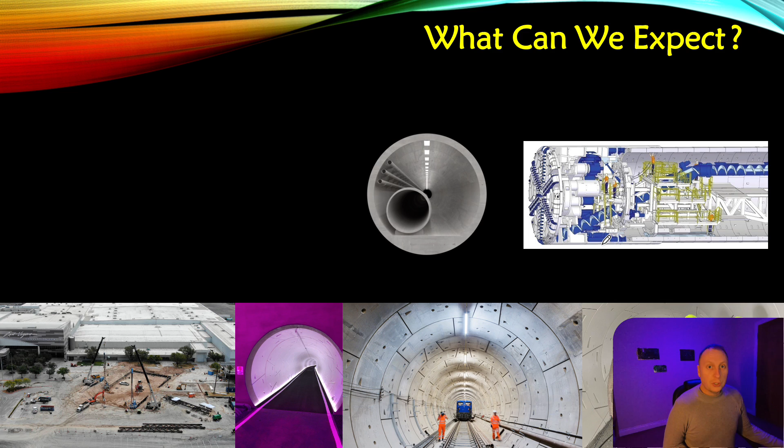So it looks like Prufrock-3 won't be coming this year, but we should, with some luck, see it early to mid next year. What can we expect? Well, Prufrock-3 will be a game changer in terms of performance.

Performance is the key term, because when it comes to mining, it's all about performance, reliability, and obviously the cost per TBM mile, which I often bring up when I'm talking to people who are somewhat hating or doubting the prospects of this particular machine.

Operational efficiency is absolutely key, and that includes everything from the maintenance of the machine to physically how many people it takes to operate that machine, how much it costs to run that machine, the actual processes behind the machine that ensure it has the materials and resources it needs to progress forward in a timely manner, consistently, without delay.

High performance. When I say high performance, I mean that this machine can really cut through the ground without having to stop repeatedly. It's a very key indicator of how much progress the Boring Company have made in regards to high performance.

Because at the moment we have a powerful machine, which is very powerful for its size, but it's not being given the opportunity to really go full out. Hopefully with some other changes, Prufrock-3 will be very high performance, even on its bad days.

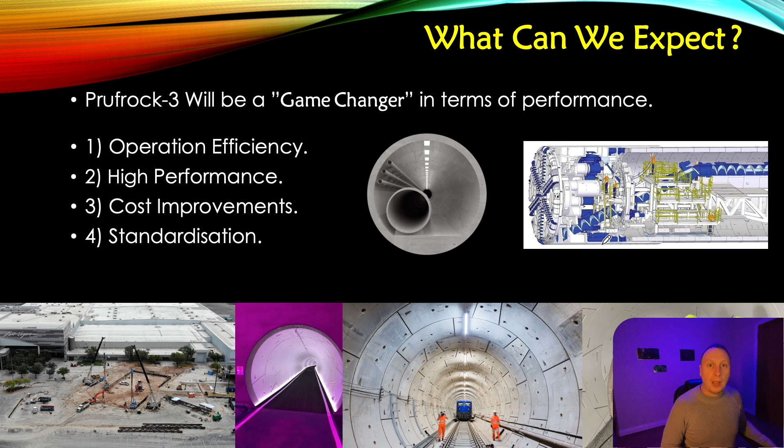The problem we have at the moment with the current tunnelling industry is we have 60, 70, sometimes 80 different standards for all the various sizes and types and processes in the machines, and it's an absolute nightmare. We need to get away from that, and get into the mentality of doing things in a set way.

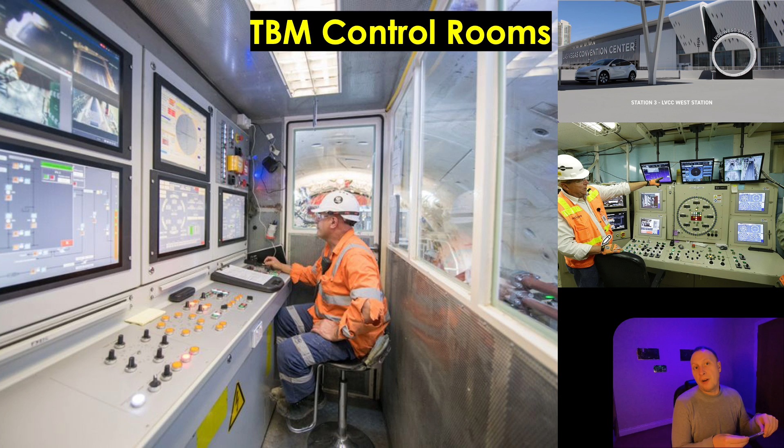Okay, so I have heard from a very good source that there is going to be a major change when it comes to the TBM control room or rooms, because they're going to have multiple TBMs. But that in itself is a little bit of a trick.

Now, the way it typically works in this industry is you have one guy in the TBM close to the excavation chamber, as you can see this gentleman here, and he is watching the various processes. He's there, able to see what's going on and to actually feel the progress of the machine and make an assessment as to what changes need to be made on a minute by minute basis almost. And he's in there basically, him and possibly another colleague, because I'm assuming they work around the clock, 24 hours a day.

However, there is a big opportunity here. You may have one operator, you may not even have an operator, or you may have an operator assisted by AI, and that one operator controls 4, maybe up to 6 machines from one control room, and that control room is not in the TBM itself. Obviously it's wired into the TBM, but it's at the surface, and you've got one guy essentially monitoring, let's say 4 machines. That's a reasonable number, and the actual system monitors the TBMs as well, and is able to analyze and diagnose issues or problems, or to assess what's needed, and it will actually automate various changes rather than him having to do the various tasks.

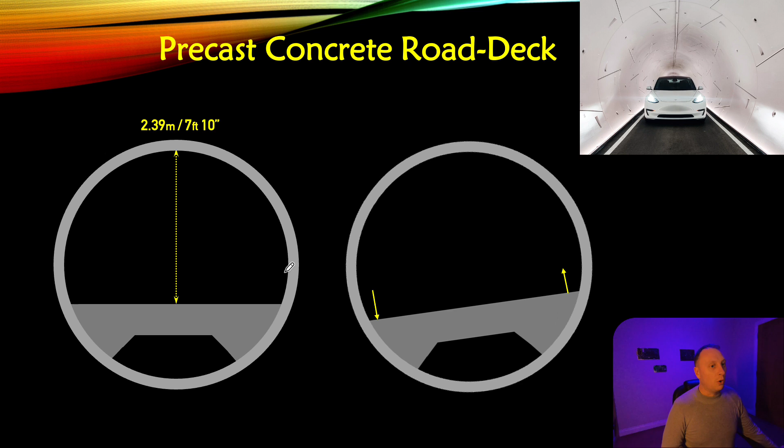Another great thing about this is ultimately these road deck segments are not going to line up quite perfectly. They never will. But what you can do is still end up with a perfectly level surface by introducing a screed on top of that. That screed does not need to be particularly deep - we're talking about 65mm, 60mm, something in that ballpark. When that surface wears down, you can simply grind it off and replace it with another surface, and there's no need to worry about wear and tear on these precast concrete segments.

So this is a massive change that we know is coming. I've heard it's coming, and it will certainly reduce the length of the program and lower the costs of the overall job.

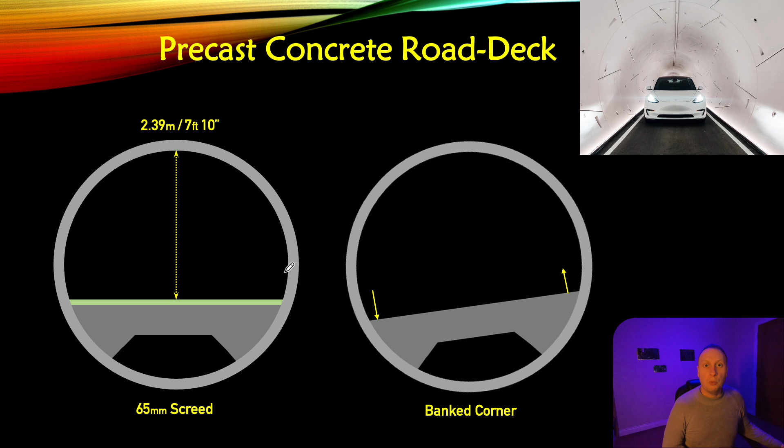Banked corners as well, incredibly important, because you can increase the speed that vehicles go around corners by potentially as much as 30% by using the banked corner. Trains do this - I believe they call it cant, so that one rail is slightly higher than the other, usually around 20, 30, maybe even 40mm higher, and that makes a big difference for trains going around corners. For road vehicles like our Tesla above here, having a banked corner as below would make a massive difference, and you can still ensure passenger comfort as well, so it's not a big deal.

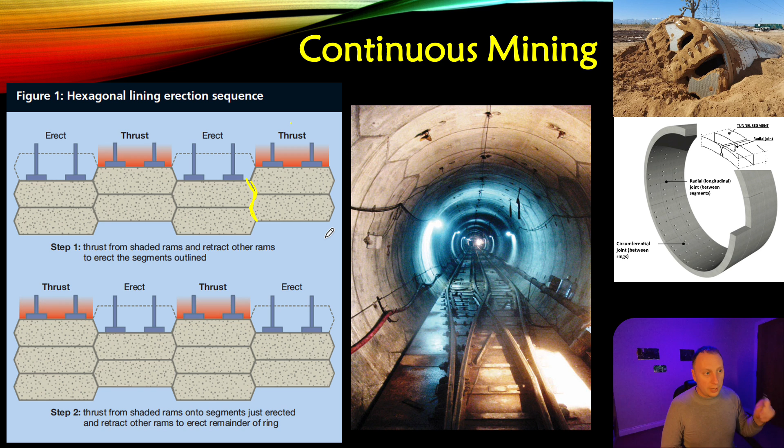Then you go back to trapezoidal for any corners or anything like that. You obviously lose some time installing that bridge piece, but you will then gain the time by moving over to your hexagonal segments. Interesting topic that I might come back to another day.

This is an inefficient process. So it looks like in the future they're going to actually have rows of trucks lined up, and they're going to have a conveyor belt that dumps the spoil directly into the trucks. Those trucks are always waiting there because they know that this machine is going to produce a certain amount of spoil per hour, so they can predict how many trucks they need lined up at any time. You've not got drivers waiting there for hours and hours, usually only maybe 20-30 minutes before they're required. That whole logistics episode is being worked on right now and will come into force with Prufrock-3.

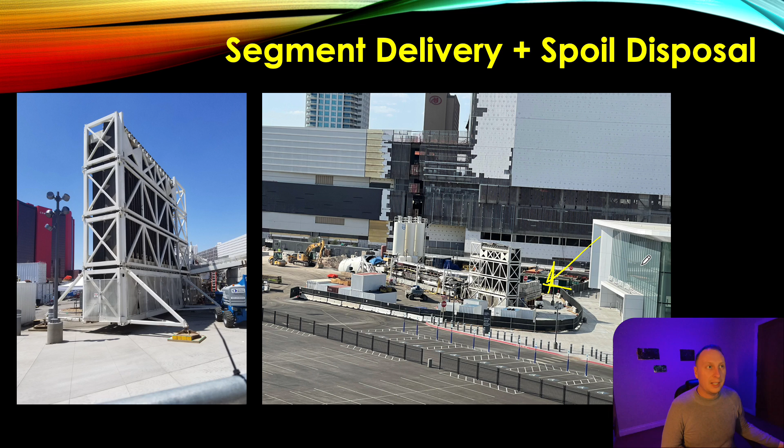We're also going to continue with the trucks that they use to move the concrete segments into the tunnel. That obviously will be at the bottom of the tunnel, and then at the crown of the tunnel you'll have your conveyor belt. So we know that's happening, and it's largely happening now, and that makes continuous mining very viable. What else is happening?

We have seen a power increase with Prufrock-2 over Godot, and it's not been an excessively large power increase, but it certainly helped a lot. The issue at the moment is the machine spends a lot of time standing still, and it's like having a boxer that's got incredibly powerful punches, but he's unable to land them because his opponent's moving around and he can't get to him.

With the improvements I've stated previously in this video, those power increases suddenly become like a multiplier, like a catalyst, and they can mine the rock a lot quicker. Potentially we could see a power increase above 85% compared to machines typical of this size. Potentially might be a doubling as well, so 100%. They were already very powerful, these machines anyway, but that extra power certainly helps them push through difficult situations, and it will be interesting to see if that comes from more powerful motors, or if they just introduce more motors into the setup, like we see here.

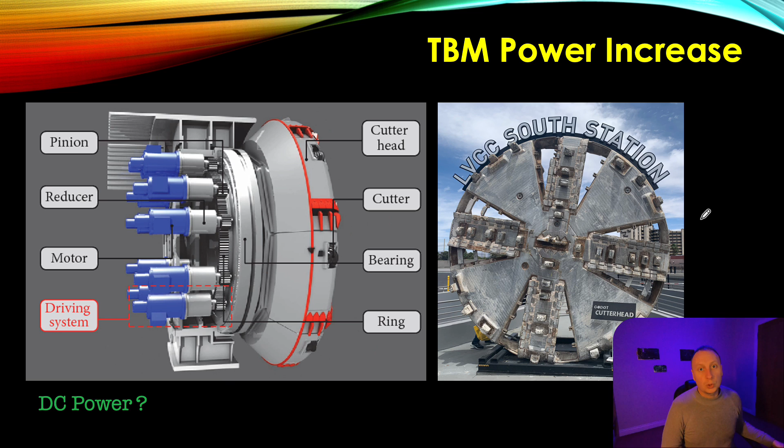Another option is DC power. They're talking about having some kind of battery setup on the surface, with a large diameter high voltage DC cable that goes down through a ventilation shaft and into the machine, and then every two miles or so they plug in a new battery. When I say battery, I mean multiple containers full of batteries that are trickle charged at night time. They also have a high voltage connection anyway, so it just allows more power with the DC connection, and there's multiple megawatts of power at the back end they can draw upon if they need to, which allows them to use a much bigger motor than they currently use in Prufrock-2.

Okay, I hope you enjoyed that. Prufrock-3 is going to be an absolute monster of a machine. Absolute monster. It's going to smash records. I think we're going to see in excess of 150 meters per day, potentially a lot more than that. But until we see this machine revealed, which hopefully will be a reveal event, I can't say for certain.

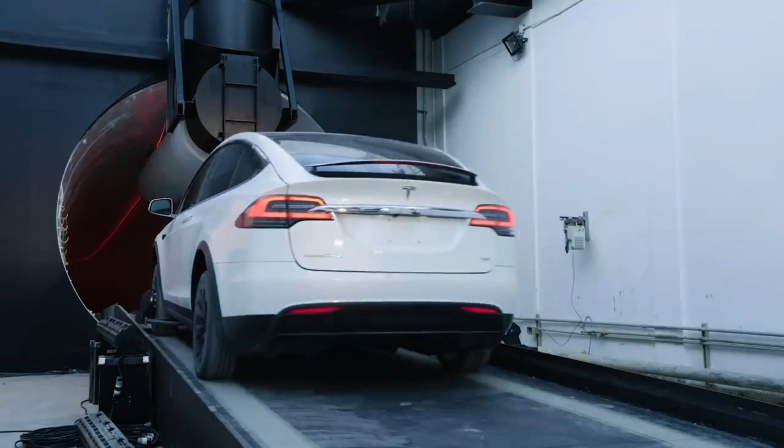Winner, winner, chicken dinner.